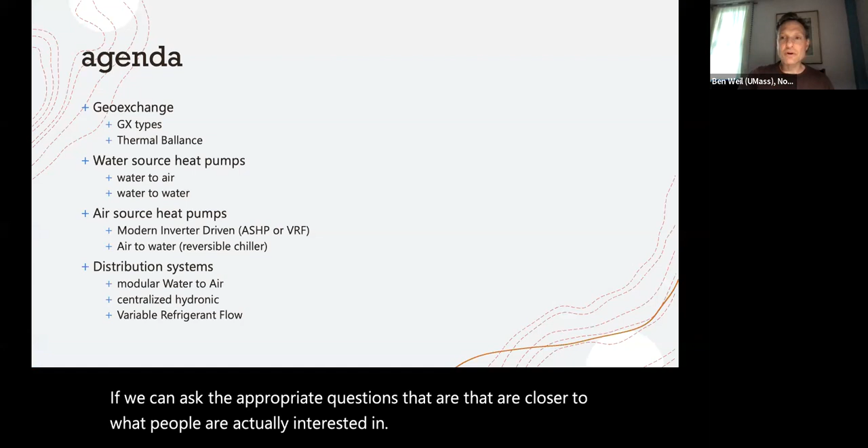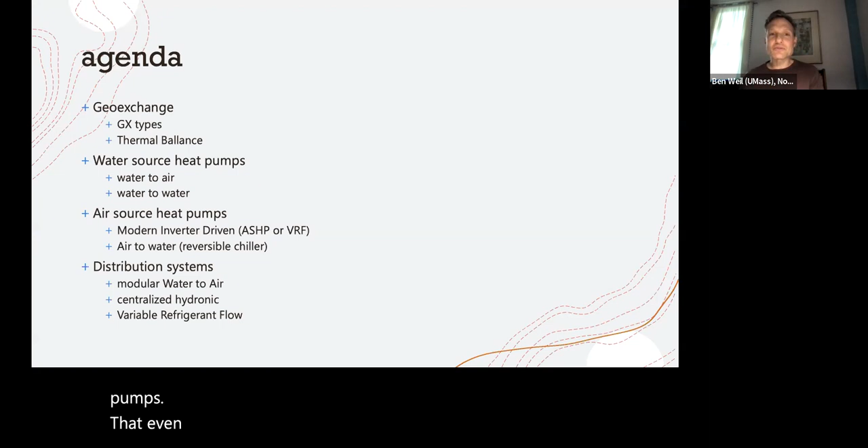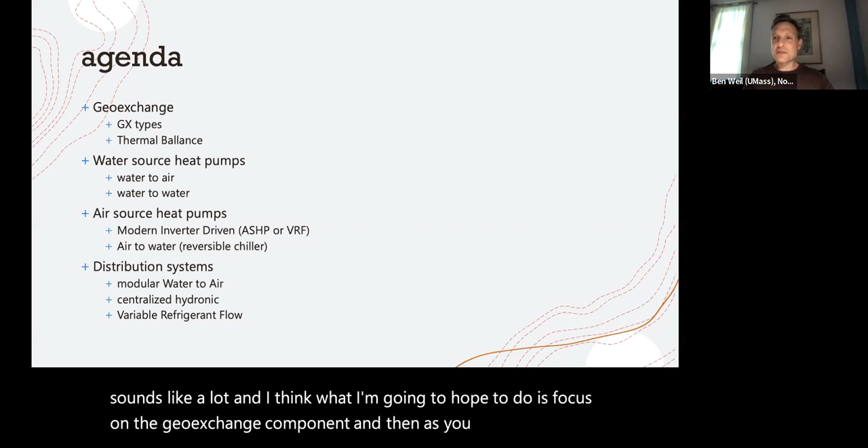So I'm going to talk about geo-exchange types. The thing that makes a geothermal heat pump system different from a water source heat pump system is simply that it's exchanged with the ground, as opposed to being exchanged with a river or a lake or some other source of a heat source or sink. Then we'll talk about water source heat pumps, which, even though they're quite old, people are less familiar with these days than air source heat pumps. I'll also talk about the comparison to air source heat pumps, and then distribution systems. I know that sounds like a lot. I'm going to focus on the geo-exchange component, introduce those other things, and see what questions come up, and we can go from there.

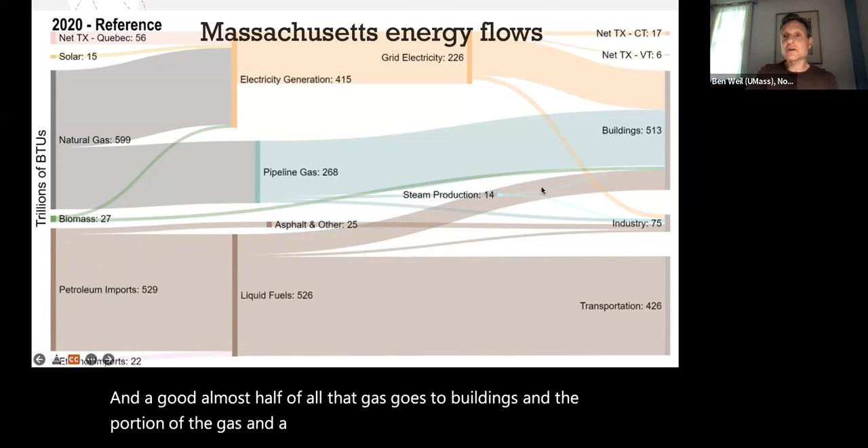So context here: if you think about the goal, here we are right now, with 2020 as the reference year, and you can see we basically import into the state a whole lot of natural gas and a whole lot of petroleum. A good almost half of all that gas goes to buildings. The portion of the gas, and a fair portion of the petroleum, that goes to buildings goes there for only one reason, which is to make heat or hot water. That's it.

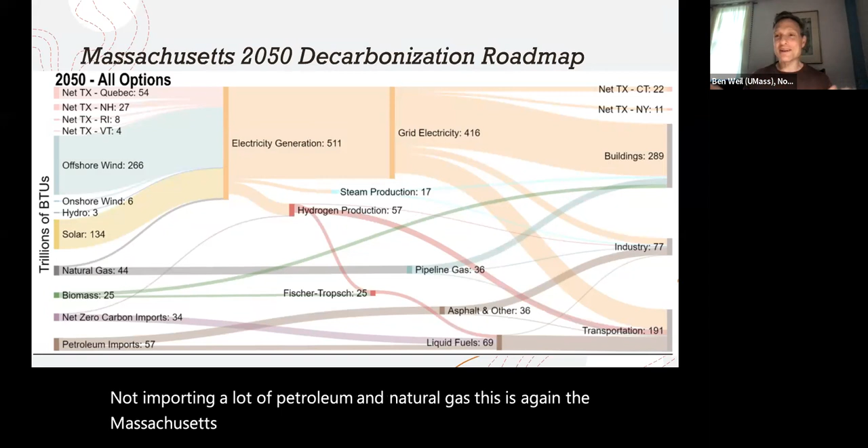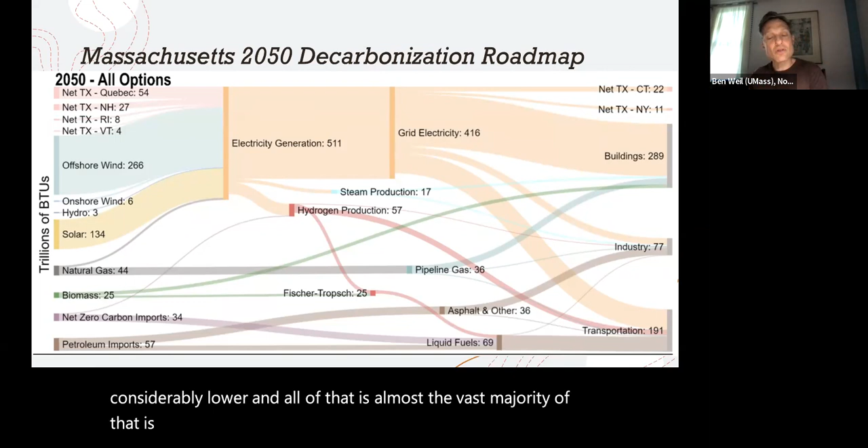So if we want to end up in 2050 not importing a lot of petroleum and natural gas - this is the Massachusetts decarbonization roadmap, and we could fight about the details - but the basic story is more electricity generation, a lot of it from offshore wind, but the total amount of energy going into buildings is considerably lower, and the vast majority of that is electricity. That means all of that heat is being produced with electricity. The reason it can be considerably lower is the assumption that we're using heat pumps of some sort, so the amount of energy going in can be divided essentially by 3. We're assuming the heat pumps are 300% efficient or better.

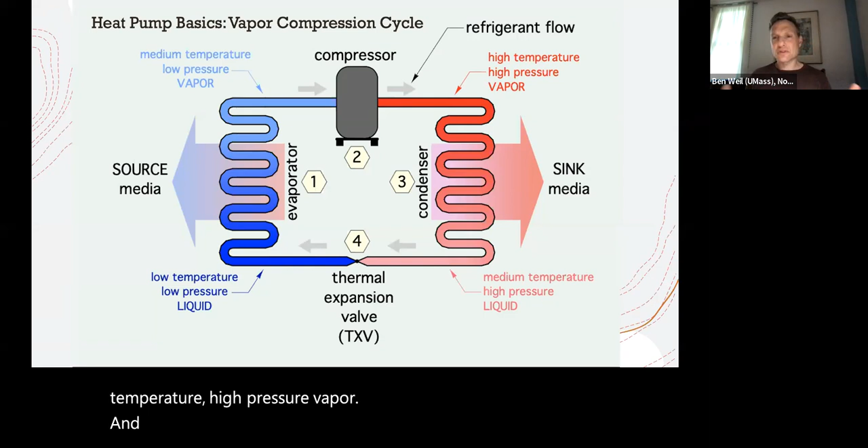So, basics of heat pumps - I'll assume you guys either know this stuff or don't need to know it to get the basic ideas. Basically we've got a vapor compression system. We use an evaporator to gain heat as it's evaporating the refrigerant, and that refrigerant becomes a low pressure, medium temperature vapor. It gets compressed, and that compression turns it into a high temperature, high pressure vapor. Then it goes into the condenser where it can lose heat, and as it loses heat, it turns into a medium temperature, high pressure liquid. The key trick here is that we have this thermal expansion valve.

If you've ever had compressed air and tried to clean something with it, and felt the can get really, really cold - that's because you've taken this high pressure liquid and released it, and as it turns to a lower pressure, it drops its temperature a whole lot. That's the basic system, and that's how we move heat from one place to another.

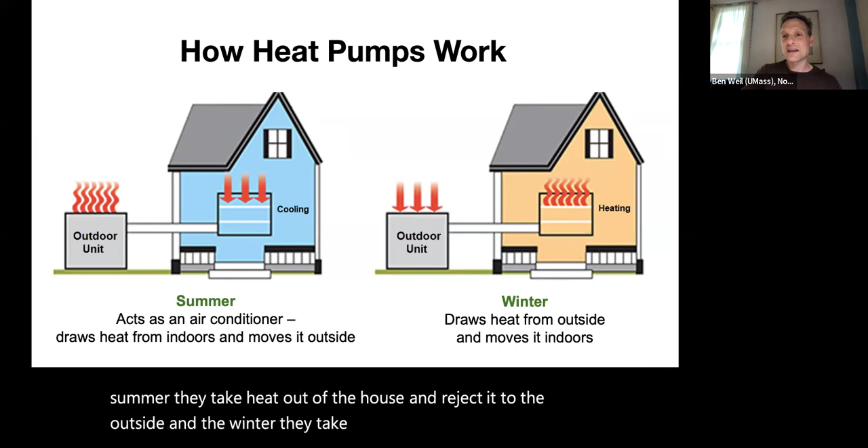Heat pumps are air conditioners that work in both directions. Typically these have been air source heat pumps. In the summer, they take heat out of the house and reject it to the outside. In the winter, they take heat out of the outside and deposit it on the inside of the house. The efficiency is the amount of work we have to do to compress that refrigerant and move it through the refrigeration cycle - basically, if we're in heating mode, how much heat do we get out of it for how much work. The term we tend to use for this efficiency is coefficient of performance.

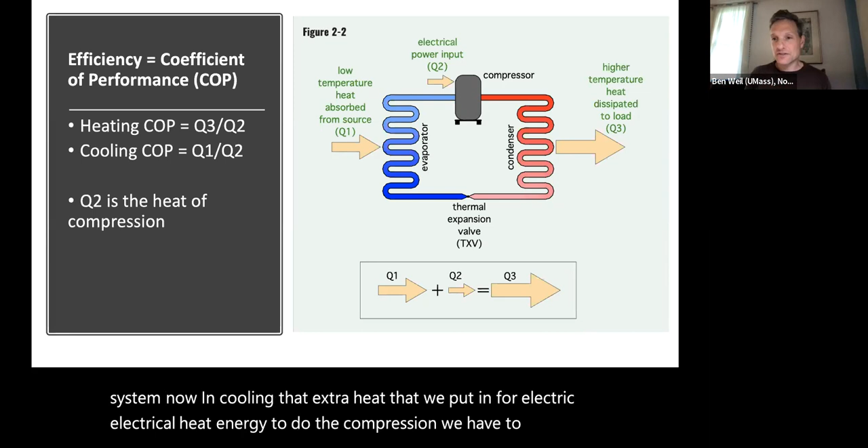A key thing to know here is that in heating, we're taking the heat that we took out of the low temperature source, plus the heat that we put in for compression, and combining them together—that's the amount of heat we're delivering to the system. In cooling, that extra heat we put in for compression, we have to reject too. It's not a benefit to us, and that's important when we think about the balance between heating and cooling in ground source heat pumps.

If you've ever bought a window air conditioner, you might have found it had an energy efficiency ratio of around 8.3. That's because if you put in 12 kilowatts of energy and get out 100 kBTUs per hour, you'd get an energy efficiency ratio which mixes kilowatts and kBTUH—watts and BTUs per hour—in a silly American way. But if you put them into the same units, you can get a coefficient of performance.

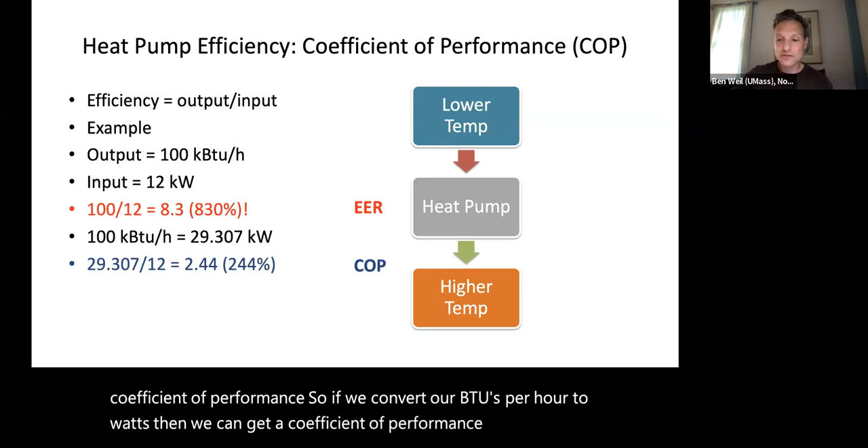If we convert BTU per hour to watts, we can get a coefficient of performance—that's just setting our terms. The key thing to understand is that the coefficient of performance is a function of the height of the temperature lift: how far do you have to move that temperature uphill. If you're doing work to raise temperature from a low temperature source to a higher temperature source, whether cooling or heating, you're always trying to move it from one place to the other.

If we're in heating mode, our maximum theoretical coefficient of performance is determined by the difference between the term on top—the high temperature reservoir, or the heat we want to deliver—and the low temperature reservoir. If that difference is really small, the coefficient of performance can be really big. The bigger that difference is, the lower our maximum coefficient of performance can be, regardless of everything else we do.

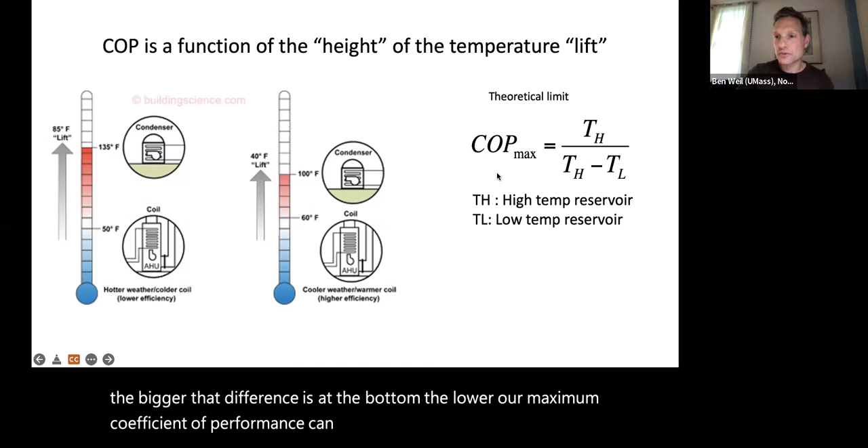That's the basic logic of geoexchange: reduce that temperature lift, and make it happen at the coldest times when we still have moderate temperatures to work with. In theory—and we'll talk about how it doesn't always work out this way—in our climate zone, roughly speaking, the ground below about 12 feet down is roughly the average temperature of our location, in the 50 to 55 degree Fahrenheit range.

That's represented by this line running across here. The air temperatures, the averages, get quite low, and then they can get fairly high. This is ground temperature about 6 feet down, and you'll notice that when it's not all the way below 12 feet or so, it's not exactly stable at 50 degrees—it's actually going lower and higher, and it's kind of out of sync with the seasons. If this is where air temperature is, the ground is not only lower with a lower high, but it happens later. Basically, the ground is a giant thermal mass—a big thermal battery—gaining solar heat at that depth over time, then losing it, modulating like a thermal mass.

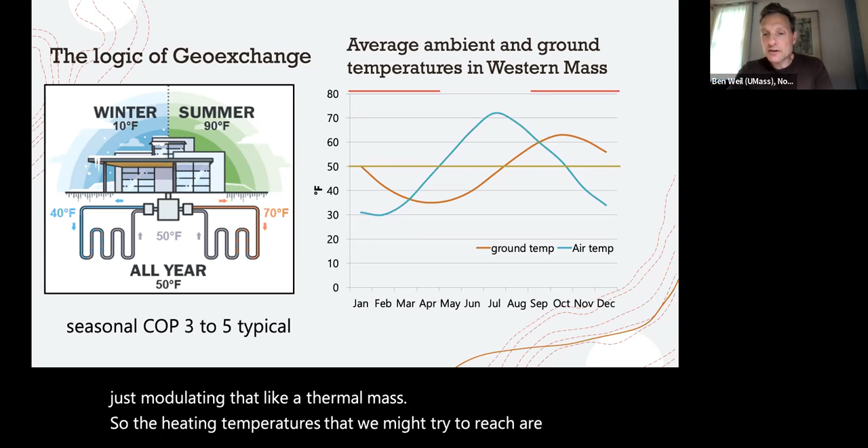The heating temperatures we might try to reach are up above 80 degrees Fahrenheit, and you can see the lift required—these green arrows, the thermal lift—is much smaller with ground temperatures than with air temperatures in February. If we were able to use even higher ground temperatures, the thermal lift would be even smaller in November and December. For cooling, it gets even better.

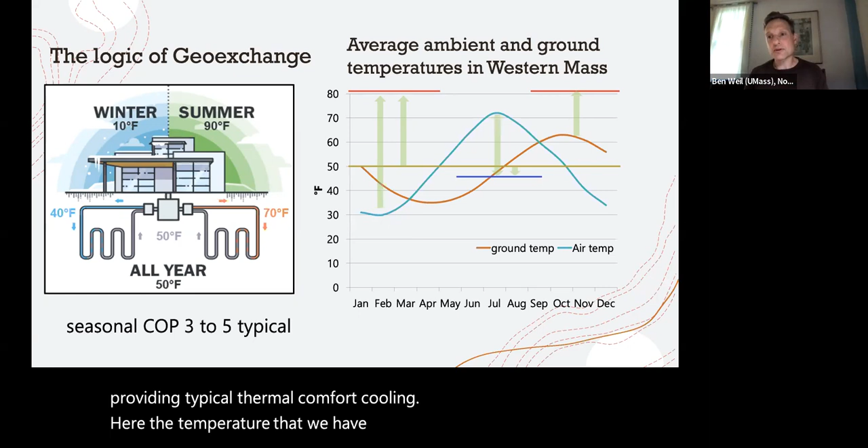For cooling, we want to supply basically 44-degree Fahrenheit water to do cooling and dehumidification—I'm not going to get into why, but that's the key temperature for typical thermal comfort cooling. The temperature we have to drop, the temperature lift between inside and outside, is much smaller at ground temperatures than at outside air temperatures. So that's the logic of why a geo-exchange system would be a good idea.

So there are a bunch of different ways of trying to exchange your heat with the ground.

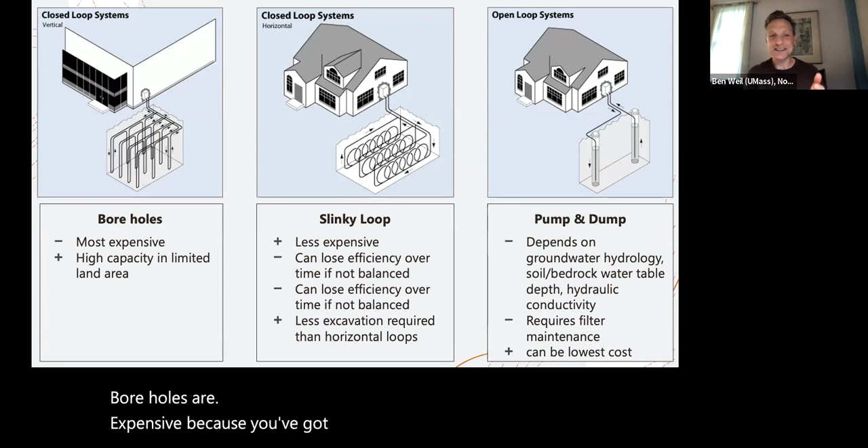Boreholes are expensive because you've got to do a lot of drilling, and you tend to have to create a lot of them. The heat exchange that each one can do is limited by the type of soil you have, how wet the soil is, how deep you are to bedrock, and what kind of rock. It's a very geologically determined situation.

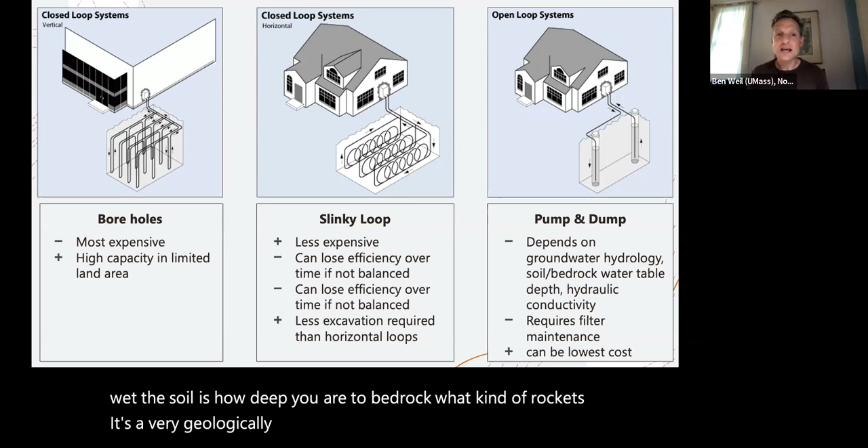You can't space them too closely together or they start to interact with each other and you lose your heat exchanger capability. So there are a bunch of reasons why boreholes are both very common, because they're the most flexible — you can always just make more boreholes or deeper boreholes to achieve the heat exchange capacity you require — and the most expensive.

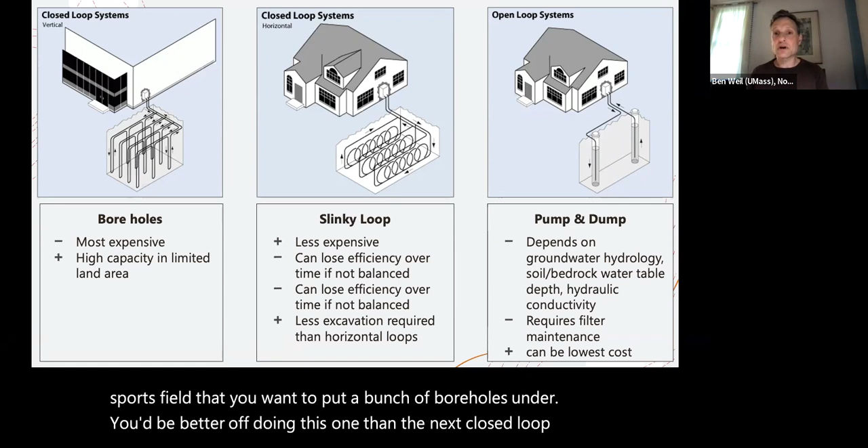But they do better when you have a limited land area. So if you have a large institution with only one sports field where you want to put a bunch of boreholes, you'd be better off doing this one than the next closed loop system, which is typically done as a horizontal loop. They could be as little as 4 feet down. They tend to be done in these slinkies because they take up a little bit less space — basically flexible pipe set underground at a decent spacing. It's considerably less expensive, particularly if you're already doing a fair amount of excavation.

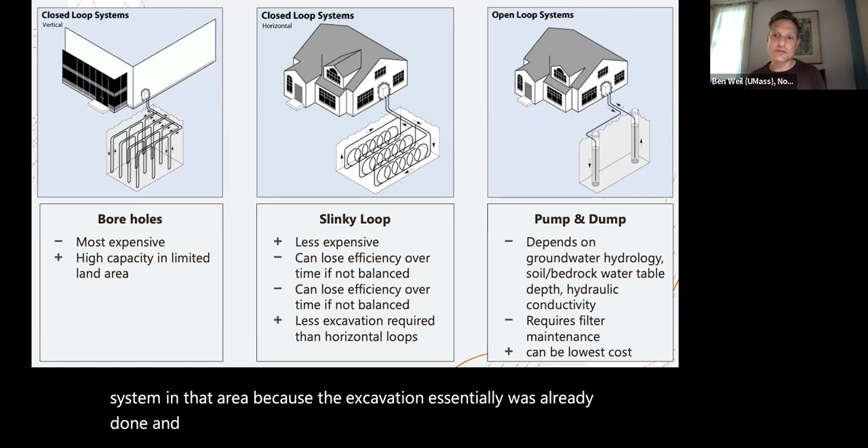Recently we were looking at a situation where we needed to do major drainage storage. Since we were going to propose a large excavation under what would be a parking lot, we actually proposed to put a slinky loop system in that area, because the excavation essentially was already done — and that's the big cost associated with slinky loop technology.

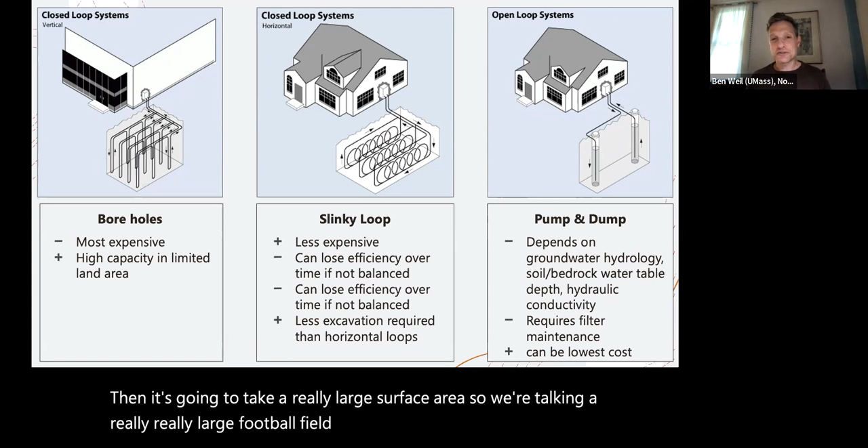On the other hand, it requires a lot of area. So if you have a fairly large heating or cooling load, it's going to take a really large surface area — we're talking a really, really large football field in order to satisfy the heating and cooling demand of maybe not such a huge school, for example.

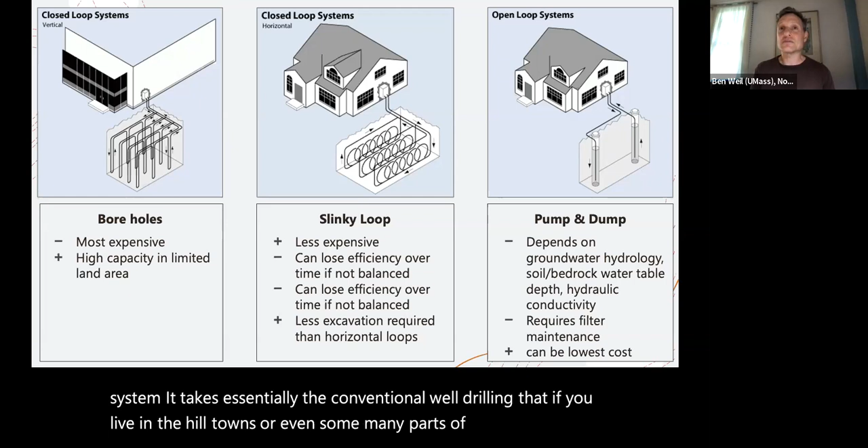Among the most common, and historically the most common especially in our area, is some form of open loop system. It uses essentially the conventional well drilling that, if you live in the hill towns or even many parts of Amherst, you have to drill your own well. A lot of people are on well water, and the same technology that drills the well works for this. In fact, very often you can combine it with well water that is actually producing drinking water.

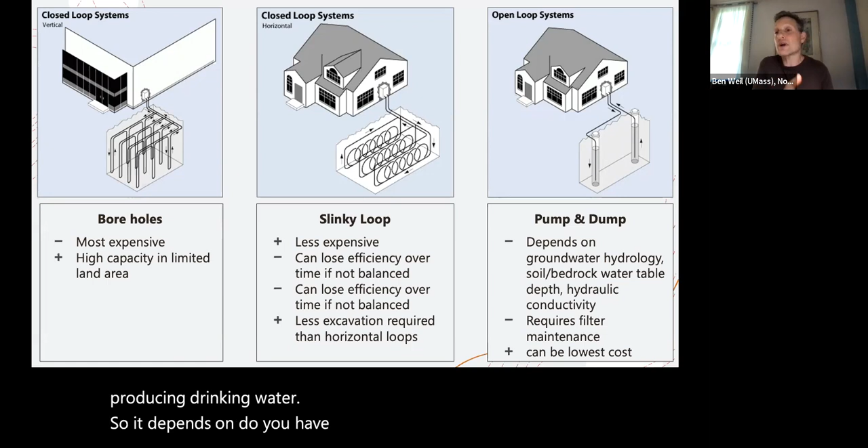So it depends: do you have a water resource? Can you extract enough water? You extract water, put it through the heat exchanger, and then send the water back into the ground. So this can be the lowest cost.

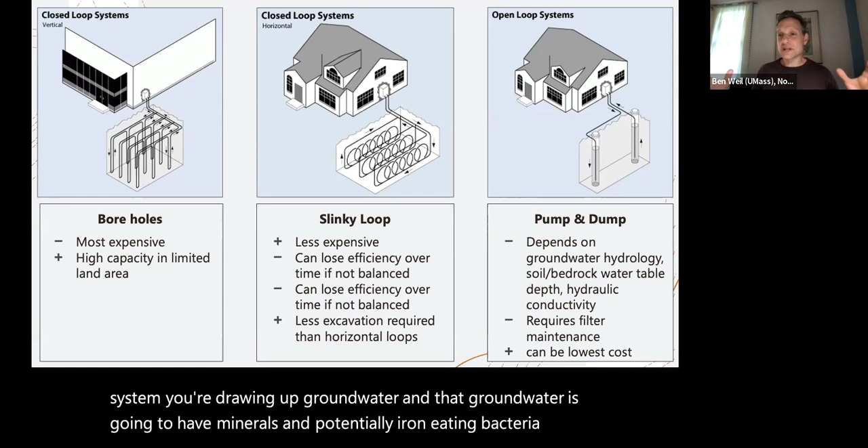However, because it's an open loop system, you're drawing up groundwater, and that groundwater is going to have minerals, potentially iron-eating bacteria, grit and debris. So you need to filter it, or it clogs your heat exchanger and the whole thing goes bad. It does tend to require filter maintenance.

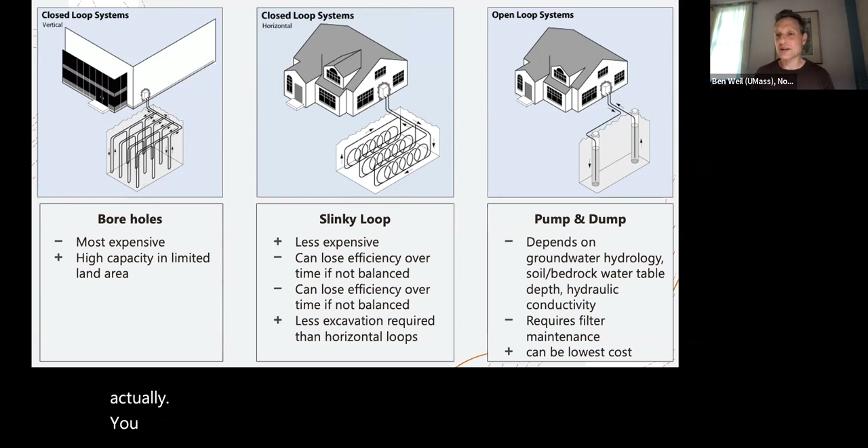I will say, I don't have a whole lot of experience designing brand new geothermal systems, but I have a fair amount of experience helping people troubleshoot why their geothermal systems are behaving very badly, why they're costing them a lot of money, why they're using a whole lot of electricity when they were supposed to be tremendously efficient. Very often the answer has something to do with the way these open loop systems were designed. That's just been my own experience.

So there's kind of a system that's like an open loop system. It still uses the same well drilling approach, although very often you're drilling much lower, because you actually have to drill into bedrock and you have to have the appropriate type of rock formation.

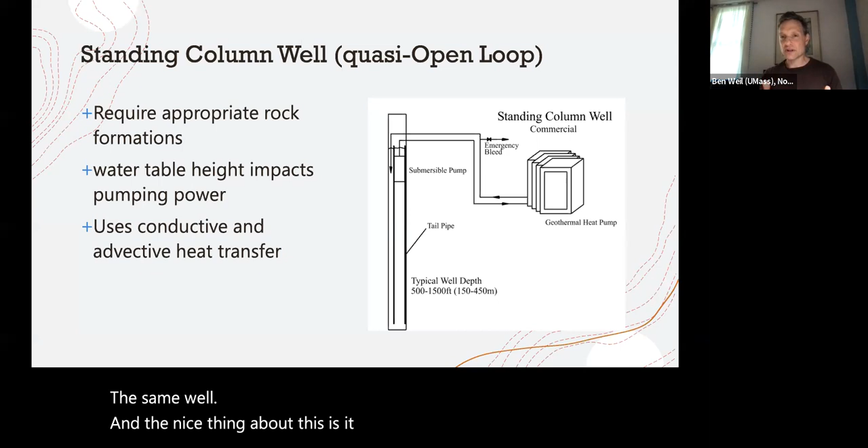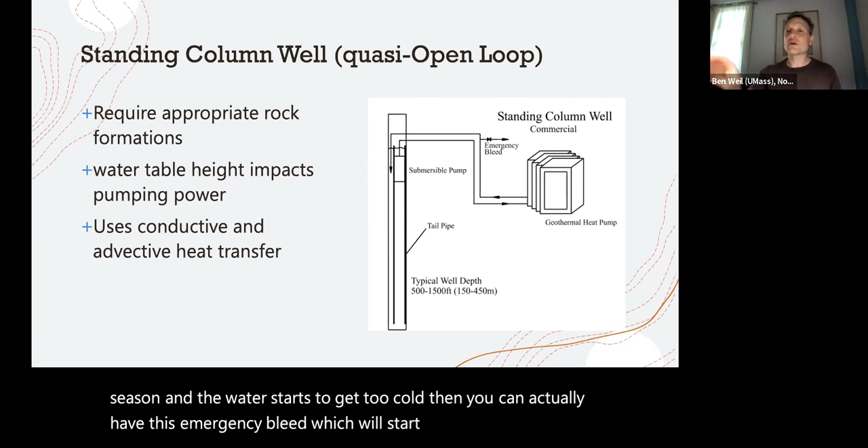This is like a closed loop system in that you basically have the water that you extract getting put back into the same well. The nice thing about this is it uses conductive heat transfer—you're transferring heat from the ground to the well, which is full of water, and the water is storing that heat as thermal mass. If the water starts to get too cold during heating season, you can have an emergency bleed that drops the water somewhere else, either an injection well or spilling it on the ground. That bleed causes a negative pressure inside the well, which draws new groundwater in, warming it back up. So it's a way of dealing with an imbalanced system.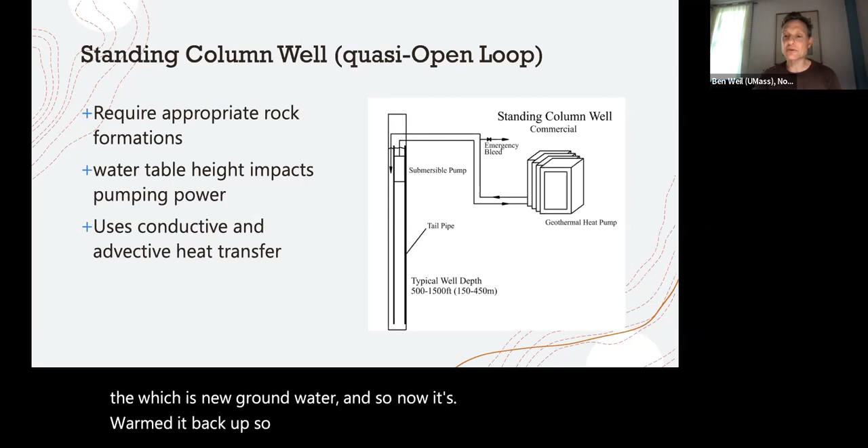So there is no best possible system. Each one has its own pluses and minuses.

An open well often has the lowest first cost. It can be very efficient if well designed, because you've constantly got fresh ground temperature water—so that 50 degrees we said was the case might actually hold true all year round. But the geology has to be just right, and you have a maintenance issue with filters that I mentioned, which can sometimes become a really bad problem, although there are ways to reduce it. And because you're interacting with groundwater, potentially drinking water, there are regulatory issues that have to be dealt with, but it's very thermally stable.

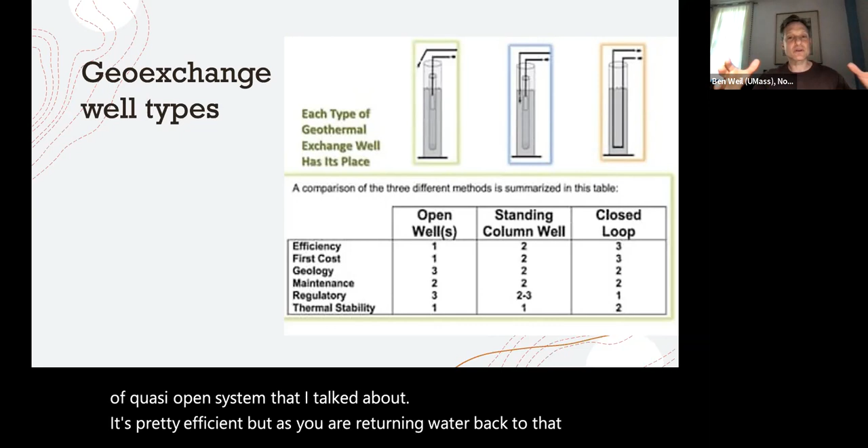The standing column well, that kind of quasi-open system I talked about, is pretty efficient, but since you're returning water back to that same well, it's going to cool down a bit. So you'll have to bleed it a little, which gives you a penalty on efficiency. It's going to cost more because you tend to have to drill a much deeper well. It works in more different types of geologies, and it potentially can have lower regulatory burdens if you're going all the way through the bedrock—if the geology is just right.

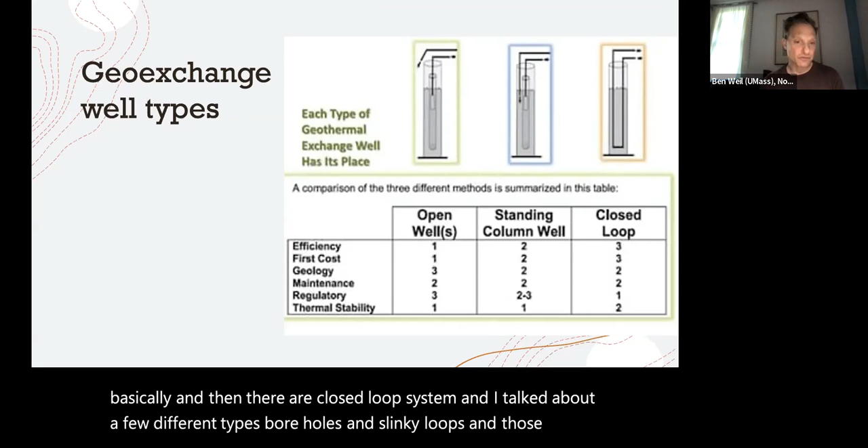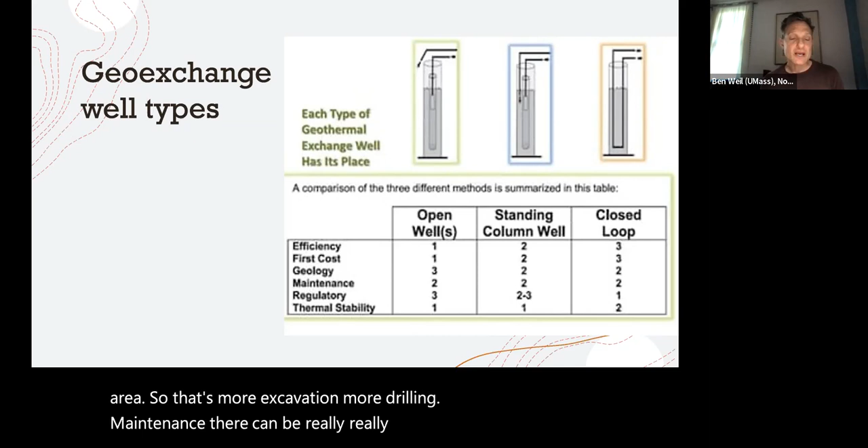Then there are closed loop systems—I talked about a few types, boreholes and slinky loops. Those tend to have the lowest efficiency because they really depend on heat exchange with the ground. They cost more generally because you need more area, meaning more excavation, more drilling. But maintenance can be really, really good. The main benefit is that you're truly a closed system, not interacting with the environment other than thermally with the ground, which can make it easier to apply without having to jump through as many hoops.

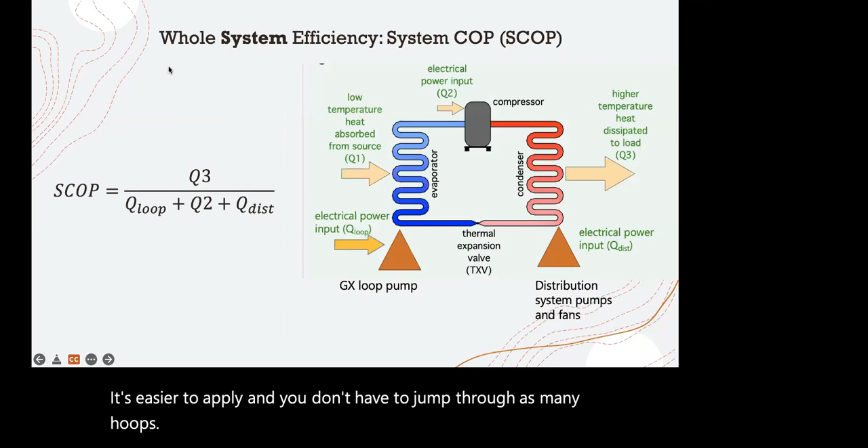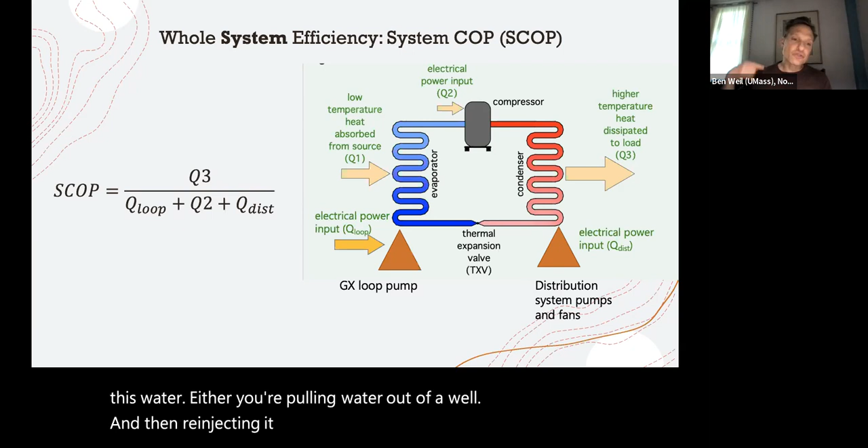So that's just the heat exchangers, and we're assuming everything goes magically well with the heat pump. But what we really need to think about is the whole system efficiency. We have a geo-exchange loop pump running all this water—either pulling it out of a well and re-injecting it somewhere, or circulating it through potentially miles of piping. Both of those can add a lot of energy to the demand of the system, and if we don't include that, we're not accounting for the whole system and how it works.

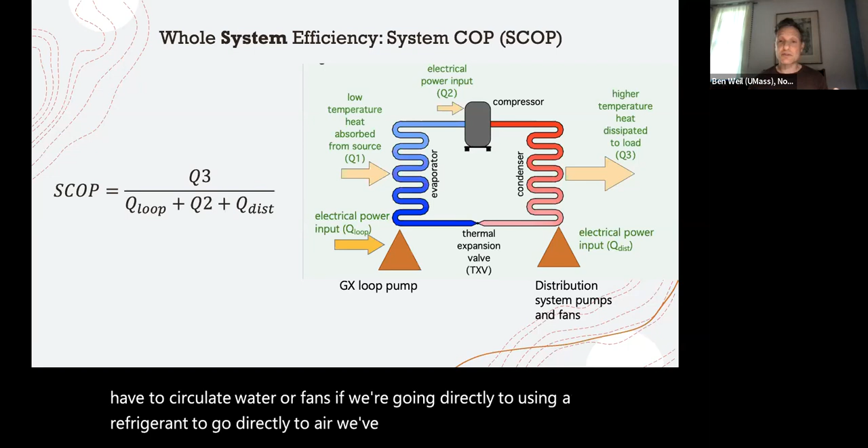On the other side, once we've generated heat for heating or chilled water for cooling, we've got pumps that have to circulate water, or fans if we're using a refrigerant directly to air, blowing air perhaps through ducts. Depending on how we've designed that, it can be a large increase in energy use. So when comparing these systems, we always want to look at the system coefficient of performance—the useful heat we get out divided by the energy we put in to run the compressor, the loop pump, and the distribution pump or fans.

So there are some design considerations—things you should look for if you're involved with designing a geo-exchange loop. If we have really, really large U-tube fields, that's a lot of friction in the pipes.

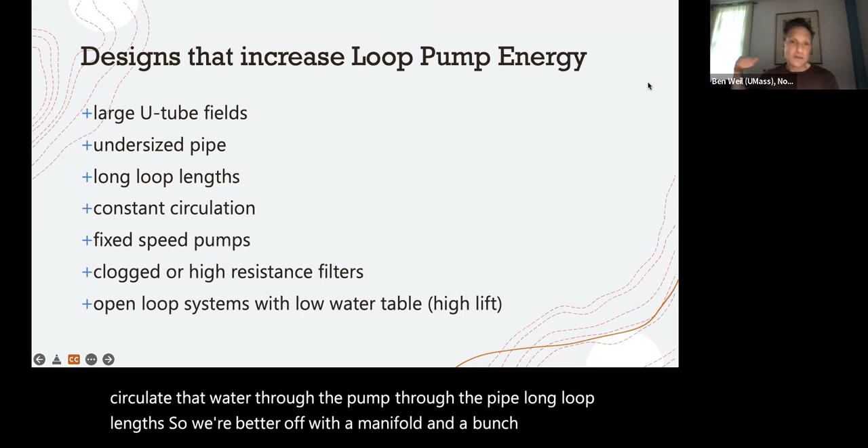That's just a lot of friction head that we've added to that pump, and that means we need a bigger pump, and it's going to work harder. If we undersize the pipe, or we don't size it for low friction, then we have a pump that has to work really hard to circulate that water through the pump and through the pipe. Long loop lengths are a problem too, so we're better off with a manifold and a bunch of shorter loops than one really giant long loop where we've got a lot of static pressure to fight.

Systems that are designed for constant circulation in the geothermal system, that's the biggest energy user I've encountered when I've worked with people who wanted me to help explain why their heat pumps weren't working or saving them energy. Probably the biggest problem has been constant pumps on 100% of the time at full speed, regardless of the demand, regardless of whether the compressor was on. You're circulating that water as hard and as fast as needed for that one hour of the year with the biggest demand possible. So: constant circulation and fixed speeds.

A thing you should know about fluids and pumps is that if you cut the speed of the flow of fluid through a system, in this case water, you can reduce the pump energy by the cube of that difference. So you get a really, really large reduction in energy from small reductions in pump speed. Most of the time, a system designed for its peak demand isn't going to require the water to be moving at the design speed. So you can save a huge amount of energy and turbulence by reducing pump speeds and having them respond to the temperatures required by the heat exchangers.

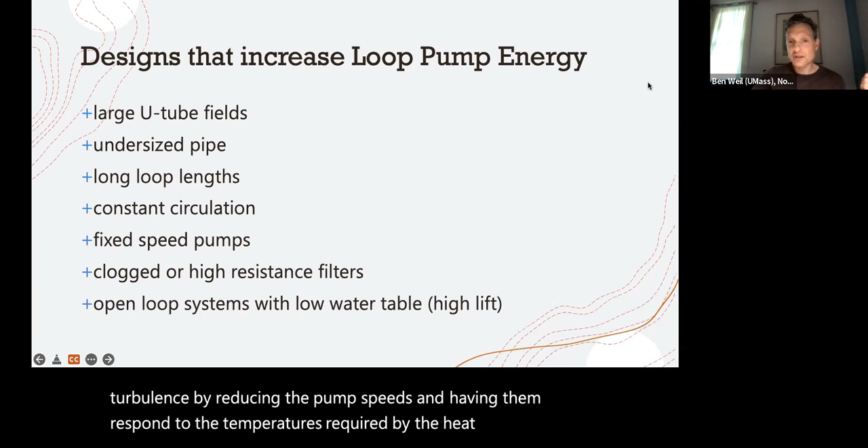Clogged filters — this is for open loop systems, and open loop systems with a low water table. If you have to lift water a high height, that's going to add a huge amount of required pump power.

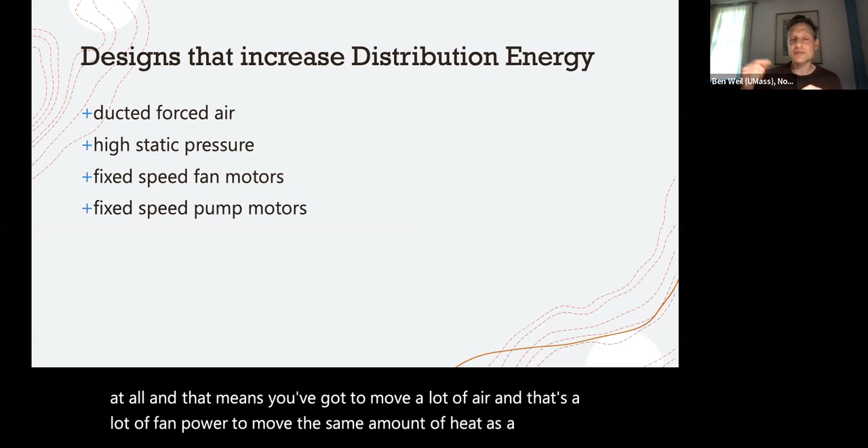On the distribution energy side, generally water is an efficient way to move heat, and air is not energy dense at all. That means you've got to move a lot of air, and that's a lot of fan power to move the same amount of heat as a small pump moving water. So generally, ducted forced air systems have a fairly large penalty to their system coefficient of performance, and with those ducted systems, high static pressure is going to increase your required fan energy.

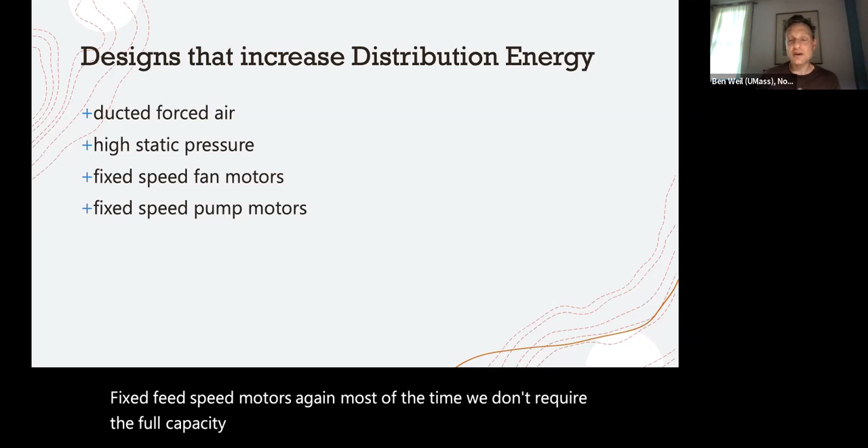Fixed speed motors — again, most of the time we don't require the full capacity of our systems. So if we have variable speed systems, we can match the flow of whatever fluid, air or water, to the actual demand and save a lot of energy that way.

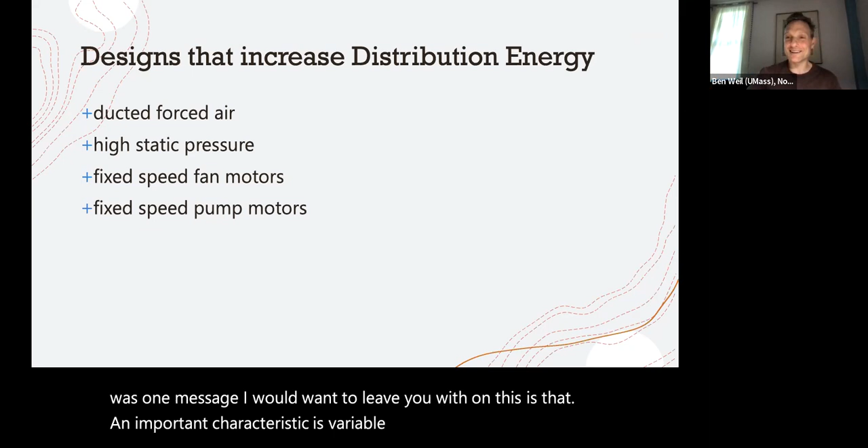If there was one message I would want to leave you with on this, it's that an important characteristic is variable speed everything: variable speed compressors, variable thermal expansion valves, variable pumps, variable speed fans.

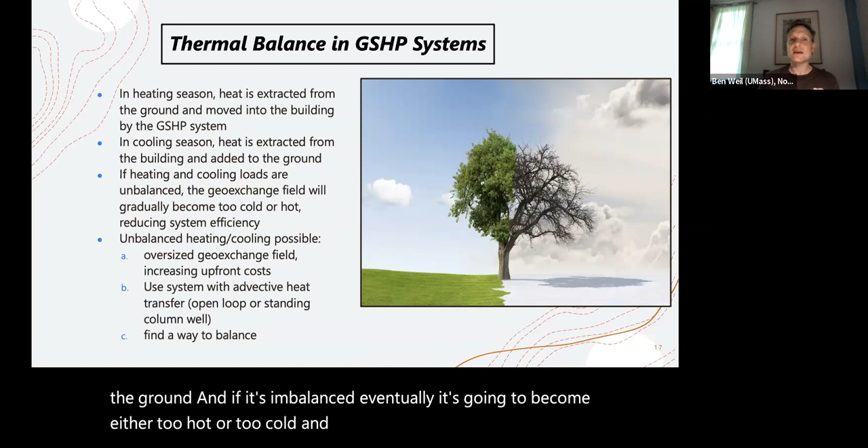The other thing to think about is that most ground source heat pump systems, except the ones using advective heat flow, which is to say bringing in new groundwater, we want them to generally be in balance. During the heating season we're extracting heat from the ground, and during the cooling season we're sending heat to the ground. If it's imbalanced, eventually it's going to become either too hot or too cold. We solve that either by making a bigger, more expensive geoexchange field, or by having some system that allows it, like an open loop or standing column well where we can move water in from elsewhere, or direct exchange with a moving water body like a river, or we have to find a way to make it balanced.

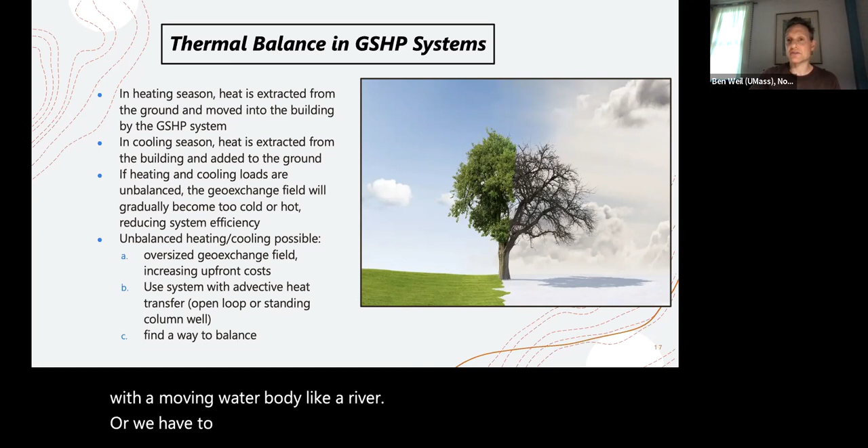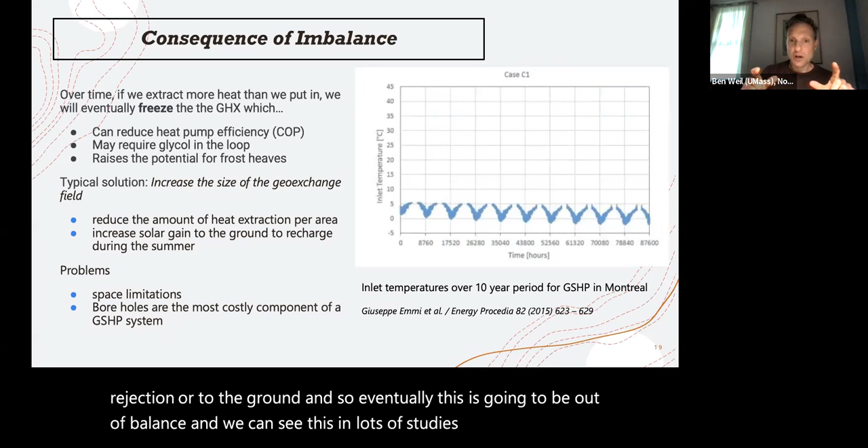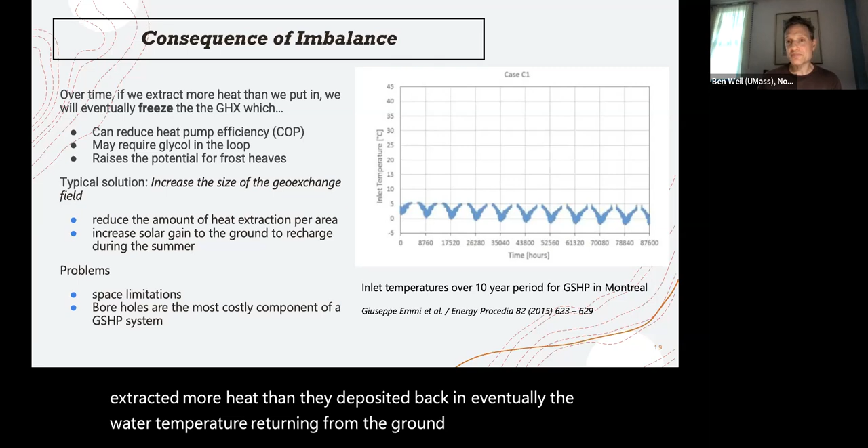This is a case in Montreal, for example, where over a 10-year period, as they extracted more heat than they deposited back in, eventually the water temperature returning from the ground was lower than freezing, which impacts that. Remember, the whole reason to do this geoexchange thing was to get nice warm water temperature that was constant, but over time we're dropping the temperature so that it isn't any better than an air source heat pump.

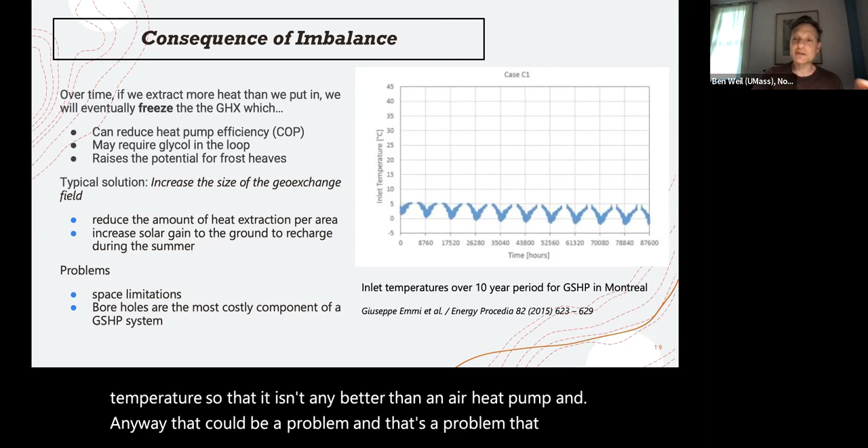That can be a problem, and it's one I've seen in my own investigations. Actually, the very first heat pump system I investigated was one where the ground was literally frozen and they were getting frost heaves in unexpected places.

So the typical solution is just to expand the geoexchange field even more, just make it bigger. That way you can essentially stretch that 10-year period out to maybe 20, maybe 30 years without really noticing it. But that's a big oversize.

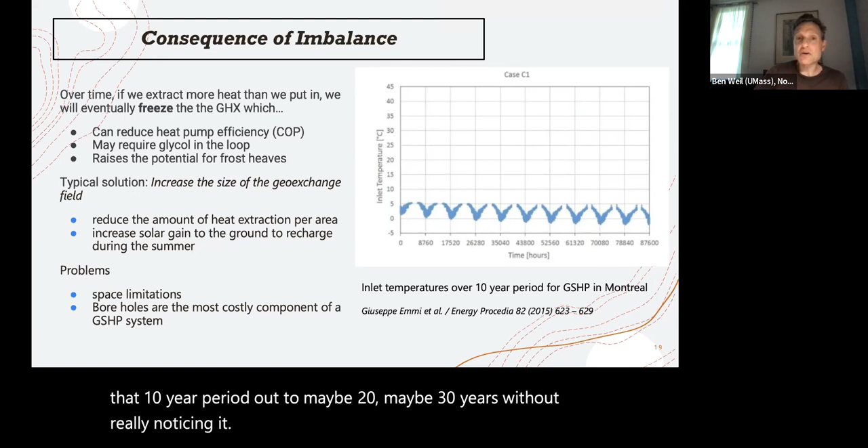Another solution, and one that I think is pretty cool, is actually using solar thermal energy in a place where you don't have a balance, to just dump that heat energy in. That's great if you've got a reason to have a solar thermal collector that is doing what it needs to be doing and has lots of times when it's actually oversized for what you need, which is to say almost all solar thermal collectors.

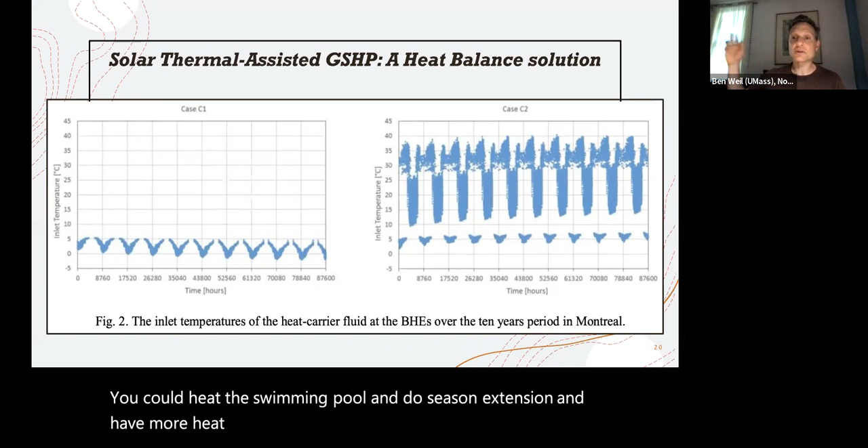So this is a nice way to marry solar thermal for, say, hot water. Let's say you had a swimming pool. You could heat the swimming pool and do season extension and have more heat production during the summer than you knew what to do with, and you could dump that in the ground.

Here's a model of how that would work. In this particular case, that's what we suggested they do. By adding the solar thermal, they got the heating and cooling into rough balance.

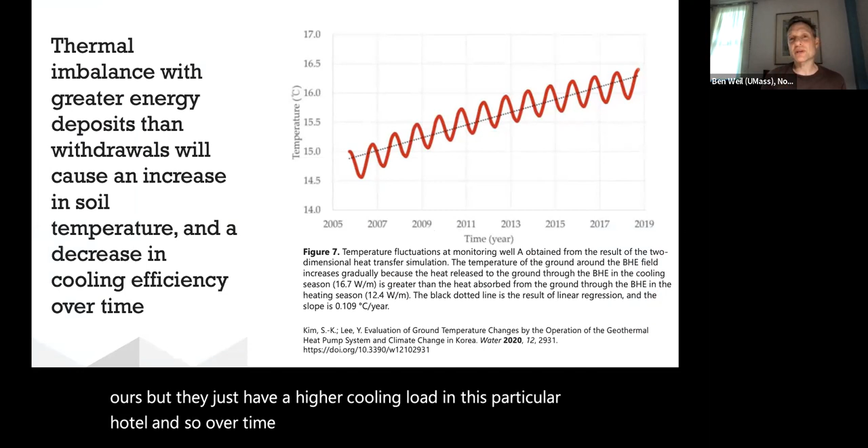You can have the same problem with too much cooling. So this is a hotel in Korea that's got a climate regime quite similar to ours, but they just have a higher cooling load in this particular hotel. Over time, the ground temperature became so hot that it's no longer really useful. You don't get that benefit for cheap and easy cooling that you used to have.

So the best way to achieve balance is to actually reduce whichever load is too big. And where we are, that tends to be our heating loads.

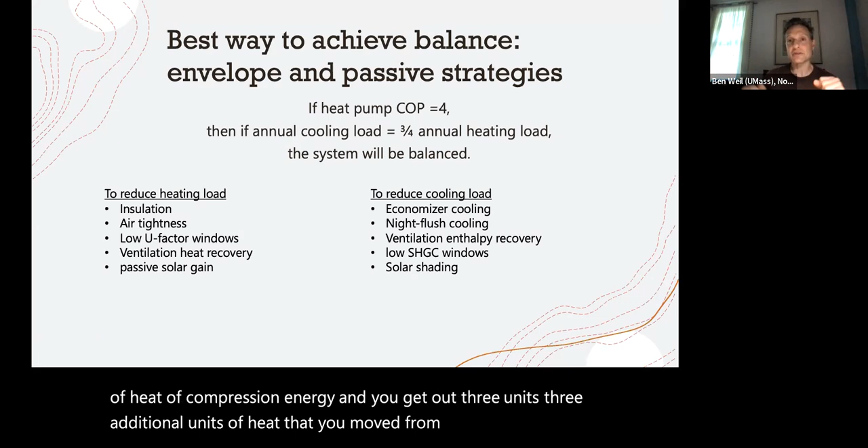Here's a great benefit for us. If we have a heat pump with a coefficient of performance of 4, that means you put in 1 unit of heat of compression energy and you get out 3 additional units of heat that you moved from outside or from the ground into your inside. In cooling season, you have to reject that heat of compression.

And that means that if your annual cooling load is 75% of your annual heating load, the ground will actually be in balance, assuming this heat pump has a coefficient of performance of about 4. And the more efficient your heat pump, the closer they have to be in balance, because the less electrical energy you're using in heating.

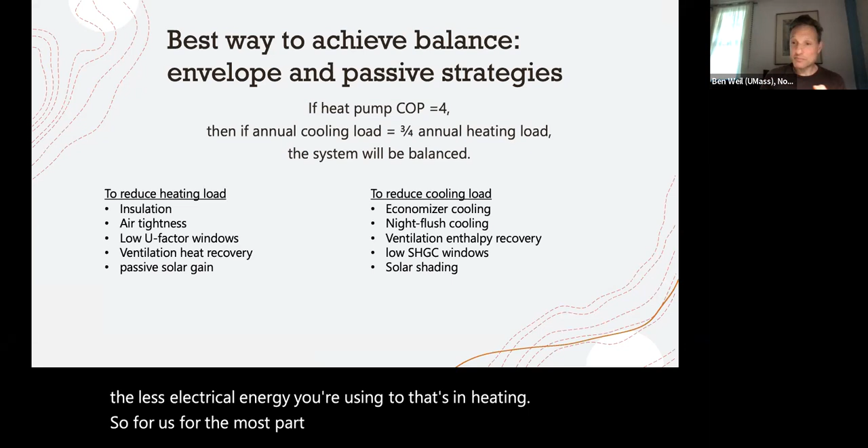So for us, for the most part, that means better insulation, better air tightness, lower U-factor windows, ventilation heat recovery, and designing for passive solar gain. In other words, if we can reduce our annual heating load—this is not the peak heating demand, which is a different story, this is just annual—if we can reduce the total amount of heat we need to extract from the ground so that it's roughly only 25% more than whatever our cooling load is, then we're in balance.

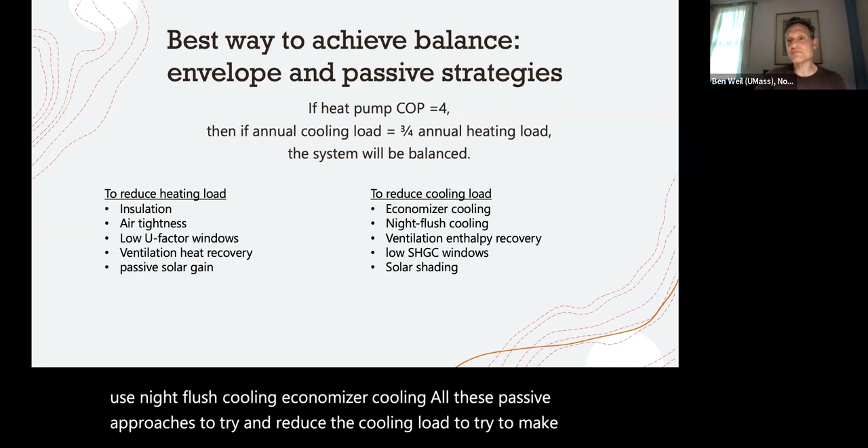And then we can have a small, reasonably sized geo-exchange system. If it happens that our cooling load is too large, then we can also use night flush cooling, economizer cooling, all these passive approaches to try and reduce the cooling load, to try to make them balance. So ideally, you end up with loads that put the geo-exchange system in balance.

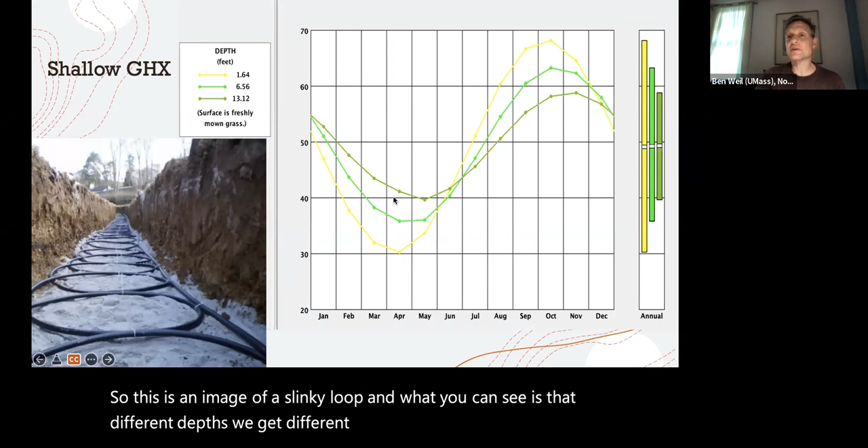We can also mix geo-exchange types. So this is an image of a slinky loop. What you can see is at different depths, we get different temperatures at different times of the year. We have computers that can sense the water temperatures, and we can open up different valves to have different sources of heat exchange happen at different times of the year.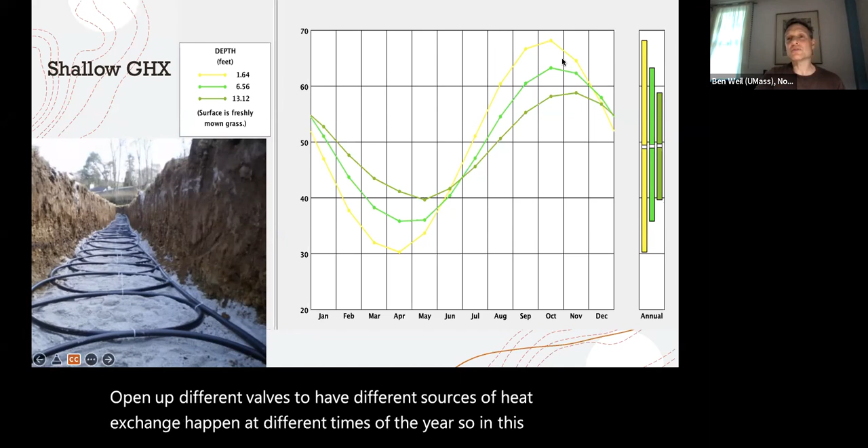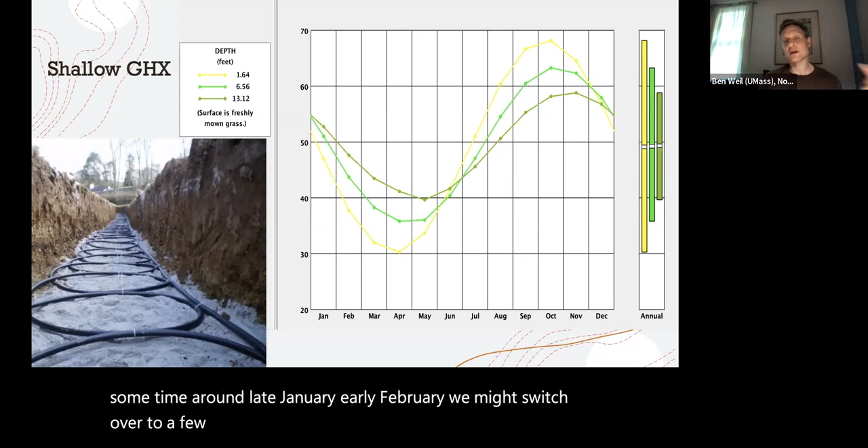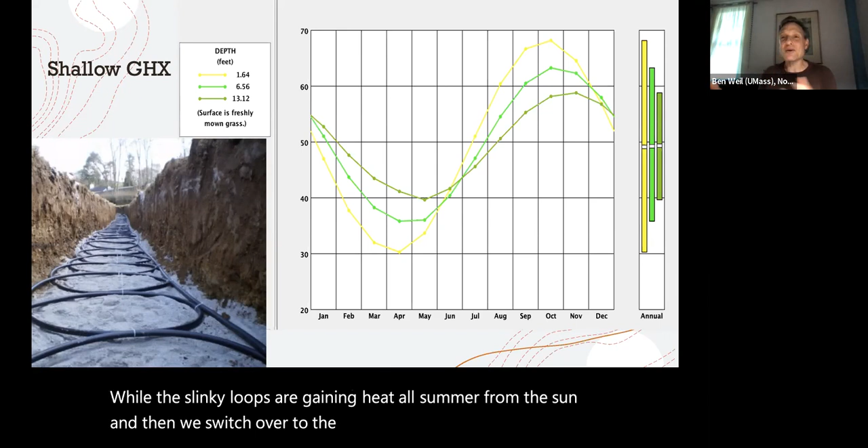So in this case, we might want to start our heating season using the slinky loops, which have spent all summer gaining heat from the sun. And then sometime around late January, early February, we might switch over to a few borehole loops that are deeper in the ground and are at that constant 50 degree temperature, so that later in the cooling season we make sure we reject all of our heat to that borehole field, while the slinky loops are gaining heat all summer from the sun. Then we switch over to the slinky loops again. That way we can have a smaller total system and spend less on each component while having sufficiency for both, especially if we've got an imbalance and we have more heating than we do cooling.

So this would be one other way to make things work. Okay, so water source heat pumps. We basically have a few different kinds of options. One is, and this is probably the most common right now, the ambient water loop.

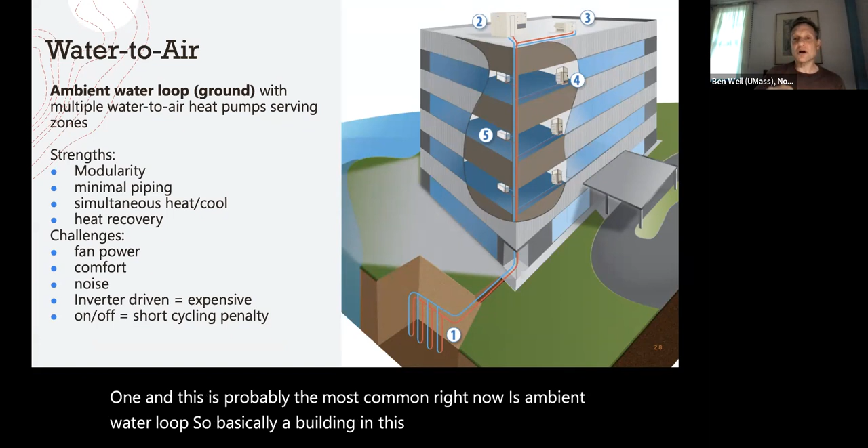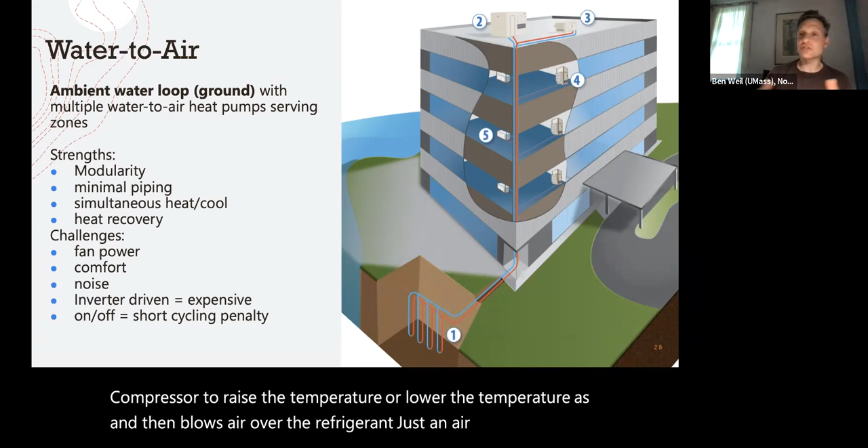So basically a building has a piping loop that circulates through the entire building, and it sends around ground temperature water. It doesn't raise nor lower the temperature of the water. Then individually in each room or each zone, there is a heat pump that sends that water through a heat exchanger, uses the compressor to raise or lower the temperature as needed, and then blows air over the refrigerant, just like an air conditioner, or just like an air source heat pump you might be familiar with if you've got a mini split or something like that.

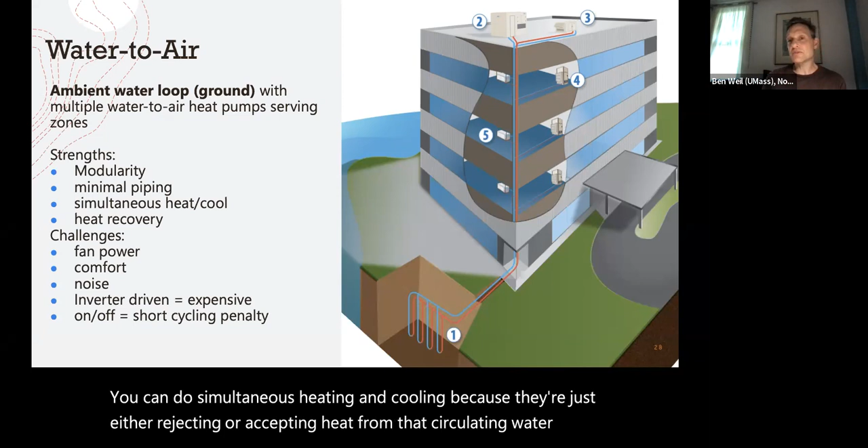So the benefit of this is modularity, right? You just buy all these individual heat pumps and put them around your building. You only have the one piping loop. You can do simultaneous heating and cooling because they're just either rejecting or accepting heat from that circulating water loop. And you're doing heat recovery. That water loop may be circulating inside the building, not interacting with the ground at all, simply taking heat from, say, the server room and sticking it in the corner office or whatever. So it's just moving heat around that way.

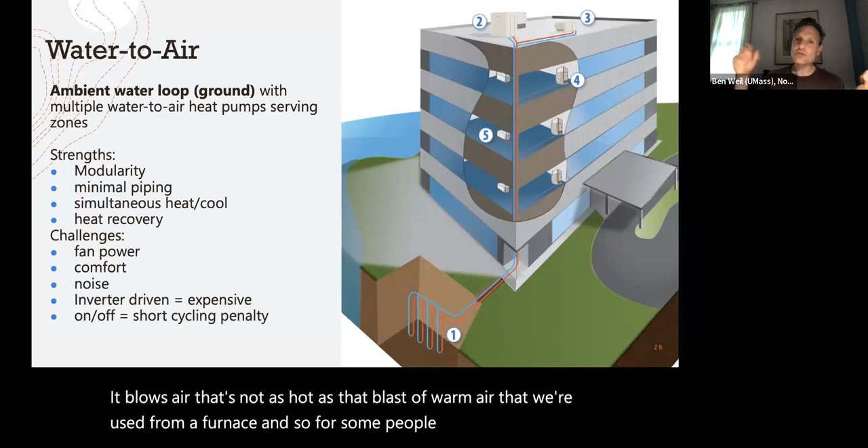The problems are fan power, right? It's an air-based system. It blows air that's not as hot as that blast of warm air we're used to from a furnace. So for some people, if it's blowing too hard, you actually get a discomfort thing because the air is blowing just a little, not quite warm enough. You also have the compressors inside the building, and that creates a noise issue.

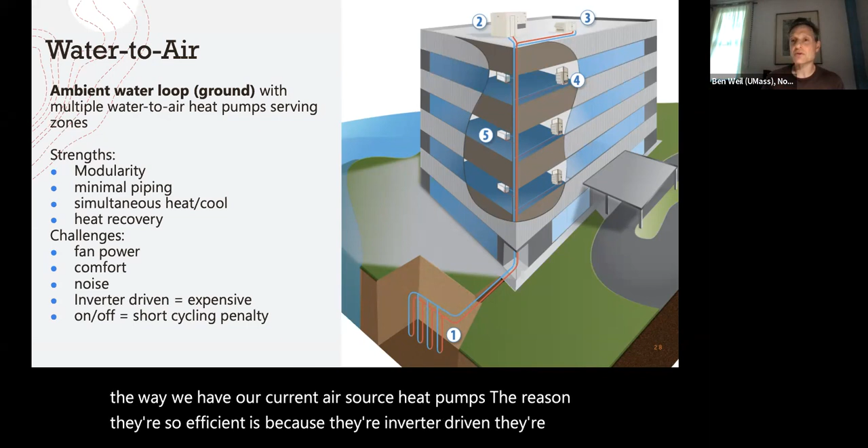If we want an inverter-driven heat pump, which is the way we have our current air source heat pumps, the reason they're so efficient is because they're inverter-driven - they're constantly adjusting their speed as opposed to turning on and off. But those are pretty expensive. So more commonly, people get a simple on-off or two-stage heat pump, and then you get this penalty. When it turns on, it takes a lot of energy to get it up to speed, and then it turns off and waits, and that on-off cycle gives you a big penalty.

Another approach is to take that geo-exchange water and run it through a central heat pump that makes hot water, or in cooling mode makes cold water. If you set them up - because you're going to have multiples of these - you can set them up to do heat recovery from one heat pump directly over to the other. They're quiet because they're out in the mechanical room, and all you're doing is circulating water, which is then going to, say, a radiant system.

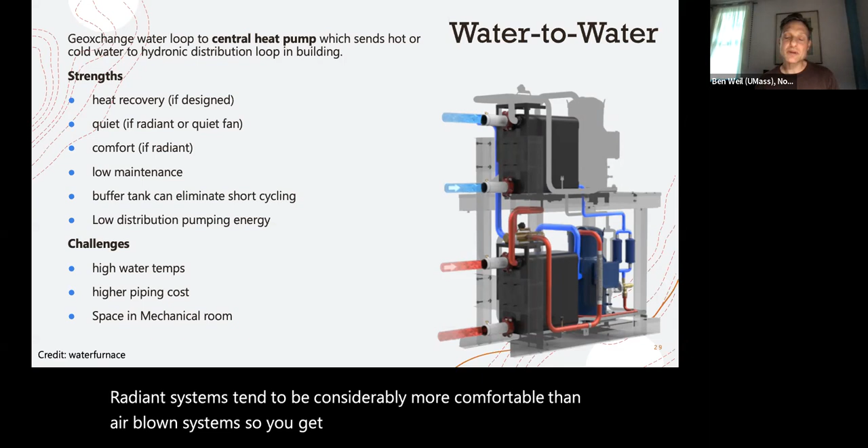Radiant systems tend to be considerably more comfortable than air blown systems, so you get a comfort benefit. There's lower maintenance cost because instead of running around a giant building fixing all the little heat pumps with all the things that could go wrong with them and all the filters, you have just one unit or one mechanical room that has regular maintenance. In this case, especially at larger scales, we don't need an inverter-driven heat pump if we have a buffer tank - basically just a tank on the distribution system. It can allow the heat pump to run long and not have a penalty from short cycling. And because we're moving water around instead of air, we use a lot less energy for pumping. The problem is, if we design for high water temperatures, we're going to have a problem.

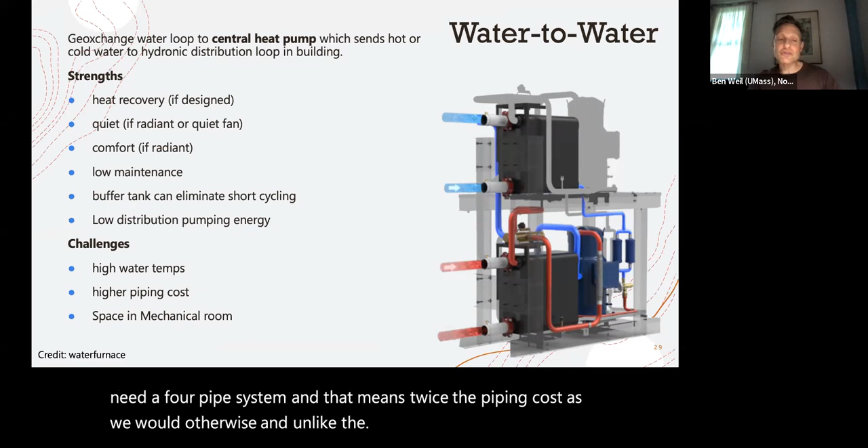It's not going to work very well, or it's going to be inefficient. If we want to do heat recovery on the heating and cooling, then we need a 4-pipe system, and that means twice the piping cost as we would otherwise. And unlike the water to air system, where the heat pumps are distributed around the building, in this case we actually need a mechanical room. We need some sort of central space. So depending on what you're trying to do.

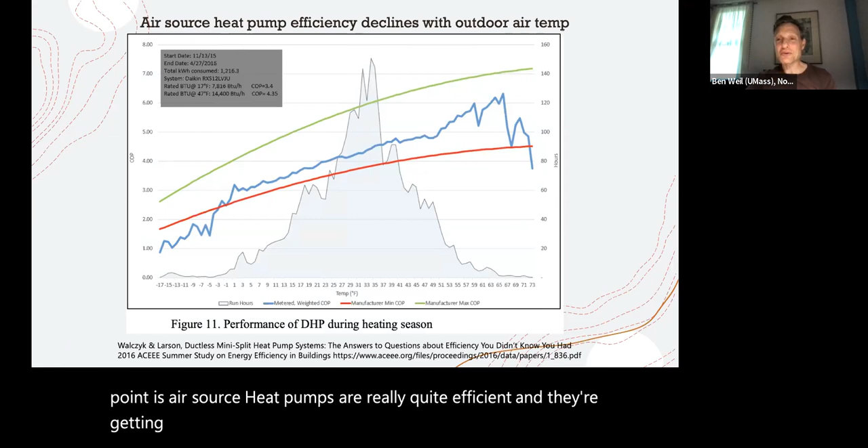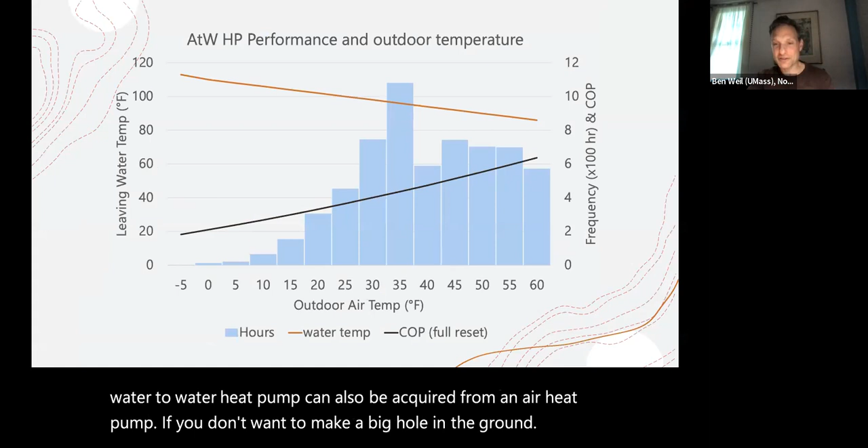So there are reasons why not VRF, and we can go into them, but one point is air source heat pumps are really quite efficient and they're getting more so. So you have to have a pretty good reason to want to do a geo exchange heat pump. We can talk about some of these other things, which I'll just skip, but I will point out that there are air to water heat pumps where all those benefits of the water to water heat pump can also be acquired from an air source heat pump if you don't want to make a big hole in the ground. And by adjusting water temperatures, we can actually get really, really high efficiencies comparable to a ground source heat pump using an air source heat pump.

Thank you. So Ben, this is very complicated in my humble opinion. And one of the things that I was confused about is how deep you have to drill in the geothermal systems. Is it that the closed loop versus the open loop systems have different depths? Could you clarify that? Okay, very good.

So the depths for drilling, if you're doing a vertical closed loop system, you will tend to be going between 200 and 500 feet down. For a horizontal system like the slinky loops that I described, you might only be going 4 feet, 6 feet, maybe 10 feet down, depending. You could even layer them. But you're going a long distance out. So it really depends what you're going to excavate. If you've got an open loop system, like a well, that could be as deep as more than 1,000 feet down. Yeah, so that could be quite deep, or in the 500-foot range. Really depends on the geology. I think that the real story is it all depends on the geology.